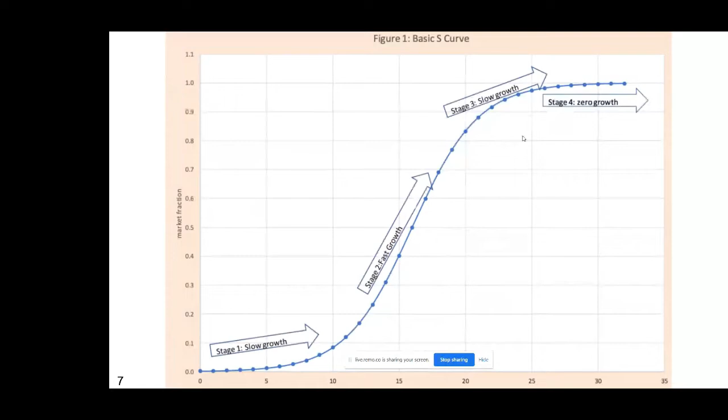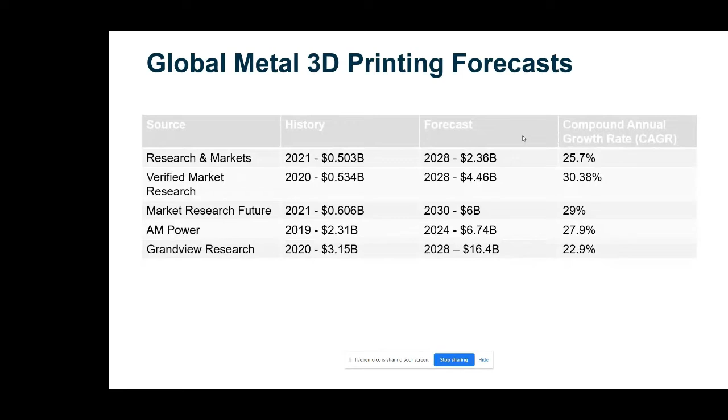Now, I saw a quote last year that said if metal additive manufacturing could achieve $5 a kilogram, then it would be a $100 billion market. Now, on one hand, that seems like an incredibly huge increase compared to the forecast that I just showed you. But on the other hand, it seems reasonable because that gets the price down below machining and in the neighborhood of formative processes such as stamping, casting, and other mass-produced parts. But that's a big if, getting down to $5 a kilogram, or for those of us in the US, $2.27 per pound.

Now, for the prior 3D printing forecast, it's not clear. What are they assuming? What's the basis for their forecast going out 7, 8 years? Are they assuming an improvement in technology from the current state? Are they assuming big drops in costs from the materials and equipment point of view?

And my guess is probably in a lot of cases, if they just expect metal AM to win market share, it's really not clear where they're expecting it to come from. But in some cases, they may just be extrapolating past growth trends into the future. So I want to try to go through some costs, analyze the costs of the current state, and analyze where we would need to go to get down to that $2 a pound goal.

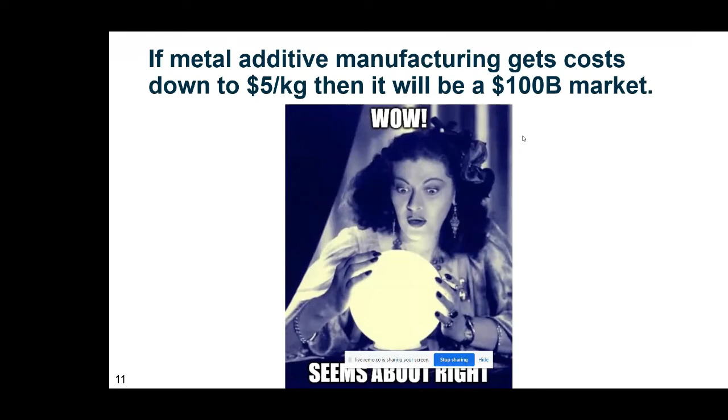So this is some basic costing assumptions. It's going to be very basic math. Hopefully it's not too boring, but I'm going to go through this pretty quickly with a generic part. So if we look at powder bed fusion, and these are my assumptions, and you might disagree with them, and that's okay. You can redo this analysis and make different assumptions with your own numbers if you want. But I'm going to assume aluminum, and what are we going to start with as a reasonable powder cost?

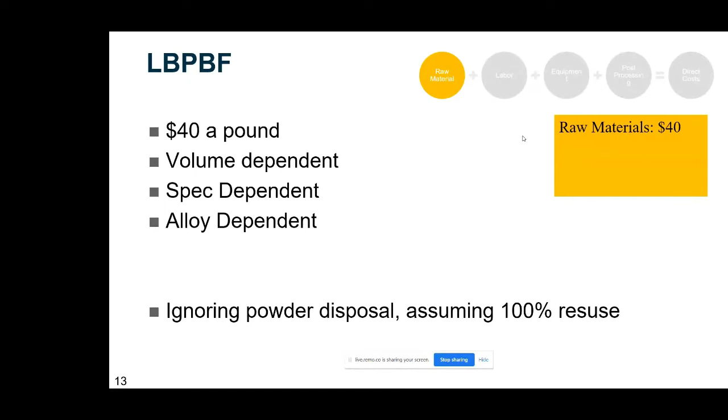Now, obviously, powder costs can really vary depending on your assumptions, but I've picked $40 a pound, which right there we have an issue if the total cost of the part is desired to be around $2 a pound. Now, if we look at labor, if we assume $15 an hour and a reasonable 50% is going to various benefits and taxes, that gives you an employee cost of $22.50 an hour.

Now, these machines print relatively slow, let's assume about a cubic inch per hour. And based on the density of aluminum, we can calculate that you're going to need 10 hours to get a 1 pound part. So we know these machines are automated, and the person doesn't necessarily have to stand there the whole time. But I make the assumption that for this 10 hours you're going to need 30 minutes of labor, or $11.25.

Similar analysis can be done with how much the time for the machine is going to cost. So, machine prices can be all over the place, but if we assume $100,000 and we divide this by 10 years for straight line depreciation, and we're running this 24/7, you can get a cost to operate a machine per hour. In this case, $1.14, and if it's again 10 hours to print a pound, then right there the equipment cost is going to be $11.40.

Now, for comparison with some of the mass production rates, this is less of an issue. For instance, I got an aluminum melt furnace quote recently, which is $90,000. But the difference is that equipment makes 1 ton an hour of material. So doing the same analysis, it actually gets you a cost of 5 cents for the machine for 100 pounds of material. So it's pretty negligible in that case. But for 3D printing, the depreciation of the machines is a big deal.

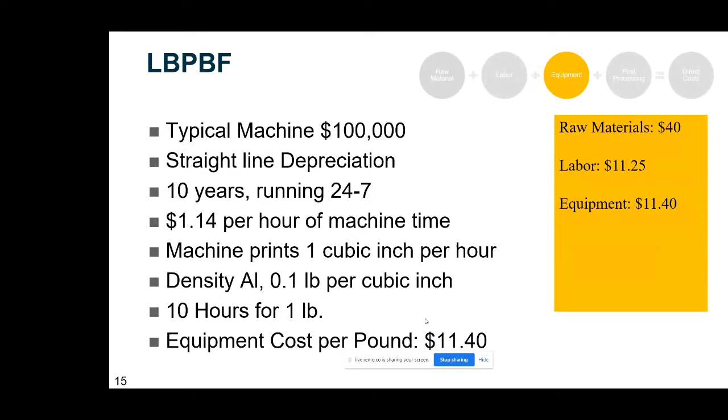Next, we have post-processing. So those can be all over the place. But if I assume that we're going to ignore heat treating and basically just look at support removal and the machining that's needed, in this case I just decided to assume 10% was a reasonable amount for machining. Just adding up these basic costs, the total material cost is about $70, or above 30 times our target goal here.

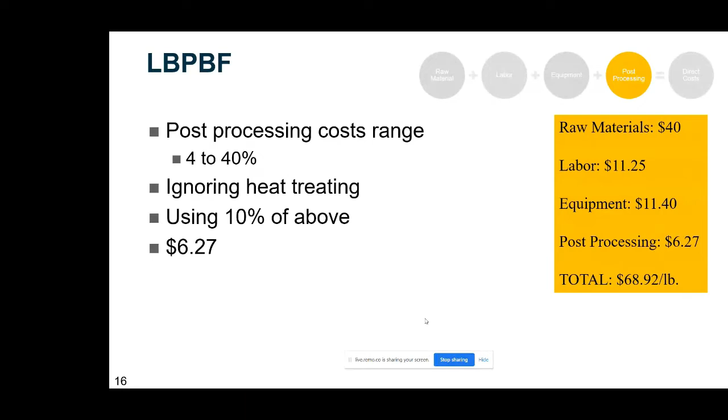So if I do the same kind of analysis with binder jetting, again, it has raw material costs. Now, in this case, they're a little bit cheaper, and binder jetting does have a somewhat higher production rate, so it's going to take less labor to go into this. It produces more pounds per hour. That part of it is actually directionally correct in getting the labor and the raw material costs down.

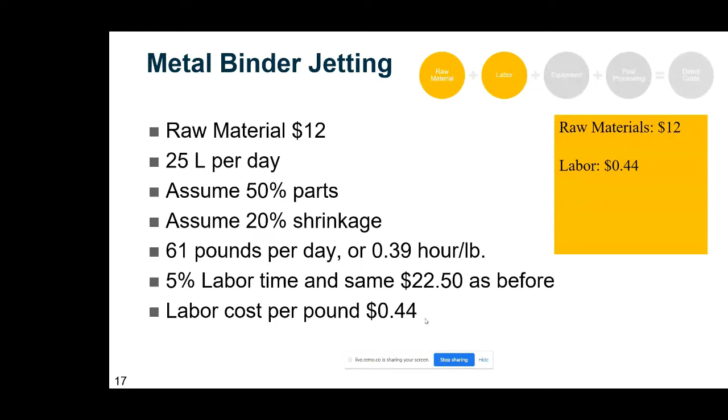However, we run into a different issue in that binder jetting tends to have much more expensive equipment. There's multiple pieces of equipment needed, such as for sintering as well. And I'm told that these typically run about $1 million. So if we're going to do the same kind of straight line depreciation for 10 years, that actually gets us to $11.42 an hour, or $4.45 per pound.

I know that thinking about things on a per pound basis is not the most common thing, but if you depreciate faster, you'd actually have this per pound cost go up. But on the other hand, maybe you can ramp up your production rates to make it go down somewhat.

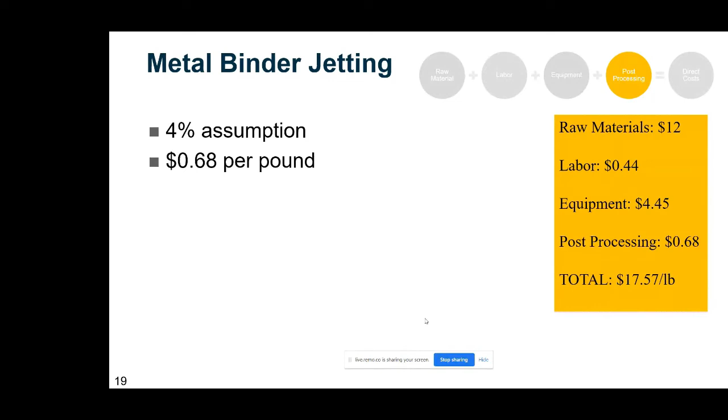But still, you're already well above this target. Now, post-processing in metal binder jetting is a little bit less because they don't typically require support material unless they're trying to deal with any kind of sagging during sintering. And it is a fairly accurate process, but I'm going to assume in this case 4% cost for post-processing. So $17.57 is my rosy scenario assumption here, and it's still a fairly long way from the target, but it is better.

Next, people might have asked me about sand printing, because casting is considerably cheaper. So in that case, if you just are going to look at the ingot metal costs, yeah, that is cheaper, $1.25. The problem is that when you print for sand, you actually have to print a good bit bigger part than the space you want. So if you want a part that's a very simple rectangular prism, 1 by 2 by 5, you actually have to print a mold that's substantially bigger.

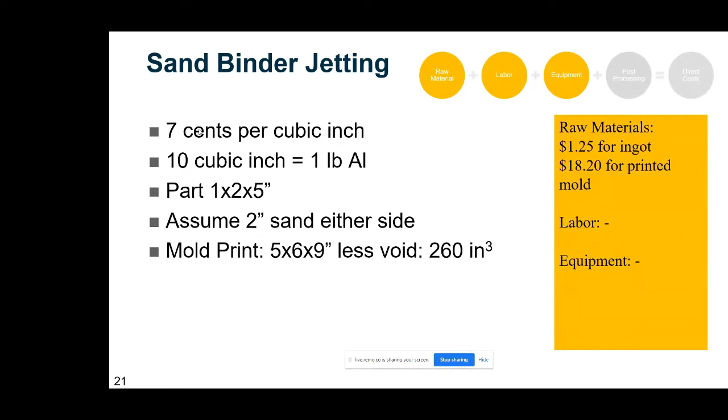And that actually means you have to print, in this example, 260 cubic inches of sand. So even at a very cheap 7 cents per cubic inch, which I believe includes the labor and equipment and margin in there, that actually gets you $18.20. So right there, again, it's gotten way beyond what the target is. I need to add in this analysis some labor for the foundry itself, as well as the other issue with sand printing is tolerance control.

So coming from a foundry background, sand casting actually has pretty poor tolerances. The molds tend to erode. Silica sand undergoes a phase change at high temperatures, which causes them to have tolerances that vary about 3%. So most sand castings get a lot of machining. One example, a foundry part I looked at recently started at 5 pounds, and they actually remove 1.5, or about 30% of the weight. And that gives 2 problems.

So basically, first, there's the machining cost itself. And then second, you're throwing away metal, which means you have a certain set cost, and you're actually dividing it by less weight for the final finished part. So in this case, I assume 20% post-processing costs. So again, the total cost in this analysis, $24.34 a pound, or about 10 times above the target.

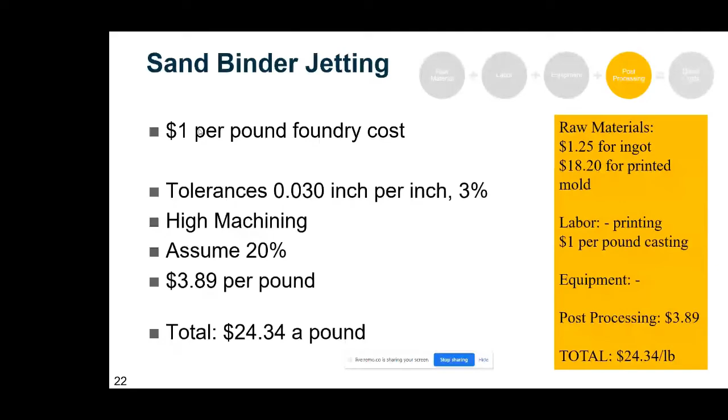So if we're trying to get down to below $2 a pound, so far, are you depressed yet? I actually consider some of these to be kind of rosy assumptions, and we're still an order of magnitude away, and this is just for costs. So something to point out, costs are what you pay for something, but price is what you sell something for. And customers, they're looking at your price, considering it their cost. So none of this includes a whole host of other costs of being in business, let alone profit.

The approach I do commonly see with the engineers in additive is having clever designs to help drive down the cost, whether this is lattices or printing in certain orientations. There are all kinds of things being done in the additive manufacturing world to try to get the cost down through clever designs.

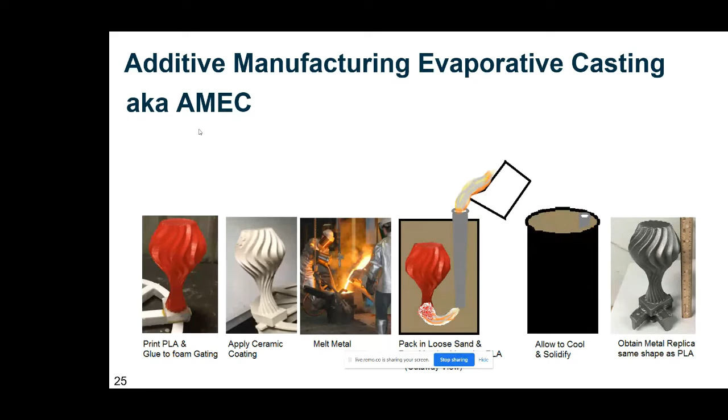And how does this approach compare? So for raw materials in this case, we are actually, again, using the foundry ingot prices, $1.25, as I previously mentioned, for aluminum.

And then we 3D print using basic FDM polymer filament. So that's pretty affordable for raw materials. Next, we use minimal infill, so it takes less time to print. And then we use much cheaper desktop printers, which have a pretty trivial amortized rate on a per pound basis, as well as if you need to speed things up, you can just get a wall of printers like some places do.

And finally, from a post-processing standpoint, this process is based on lost foam casting. So it's about 0.3% accurate and needs much less machining. Now, the labor on this does need some work. Right now, this is a medium TRL process, and it's not quite yet ready for being in high production. But at some point, it would be possible to get this more automated. Right now, it requires about the same amount of labor, whether we're making a 1 pound part or

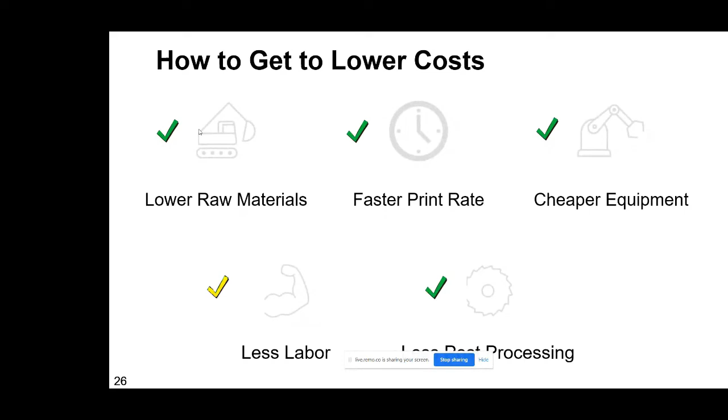a 40 pound part. But looking at these assumptions, and kind of similar with the assumptions before, we actually can get a similar kind of costing for AMEC. And in this case, as I said, the raw materials, much less. The labor, I did this analysis assuming a larger part so we could actually get the labor down. Otherwise, the labor would be much higher if we were looking at a 1 pound part. The equipment is very negligible, and post-processing has been scaled down to be similar to the above rates.

So again, $3 per pound is not quite there yet, but it is definitely getting closer. And I think that with this process, if we weren't looking at aluminum, if we were looking at something like A36 steel, you can take out a good bit of the cost from the ingot prices.

So to wrap up my talk, I want to give you some predictions on where I see the additive market going. I actually think that the market is bigger than even some of the most optimistic forecasters think. I think that $2 per pound is really not crazy. But of course, sales price depends on value, not cost. And people will try to charge as much as they possibly can to sell parts. I mean, that makes sense, right?

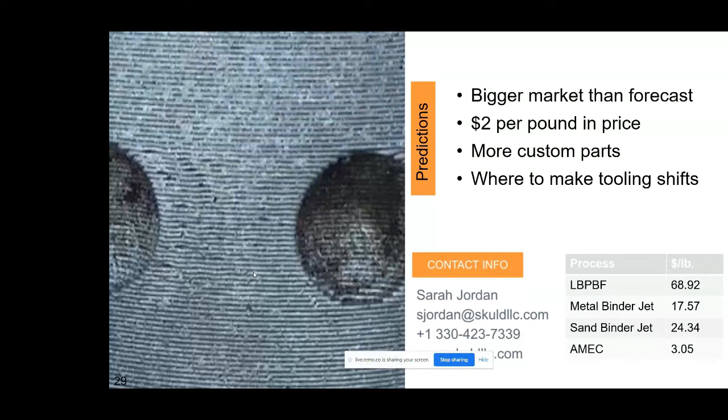Finally, right now, in a lot of cases people use AM for prototypes or very, very small volumes. But I think that the point at which tooling is justified is going to shift towards higher numbers. We think somewhere between 5,000 and 10,000 pieces. Above that, tooling would probably make sense. Below that, maybe it doesn't. Of course, this is going to depend on if you're using additive manufacturing to make part designs that aren't possible by other means, in which case you will not necessarily make tooling at all.